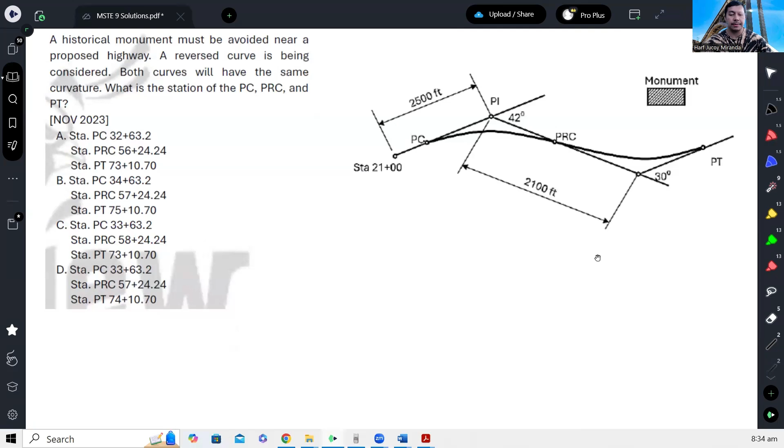A historical monument must be avoided near a proposed highway. A reverse curve is being considered. Both curves will have the same curvature, meaning same radius. The radius of the first curve is equal to the radius of the second curve. Let's call it R.

What is the station of PC, PRC, and PT? So we need to find these. The given station is here, which is not PC. The PC is indicated here. So to calculate that, let's look at what's given.

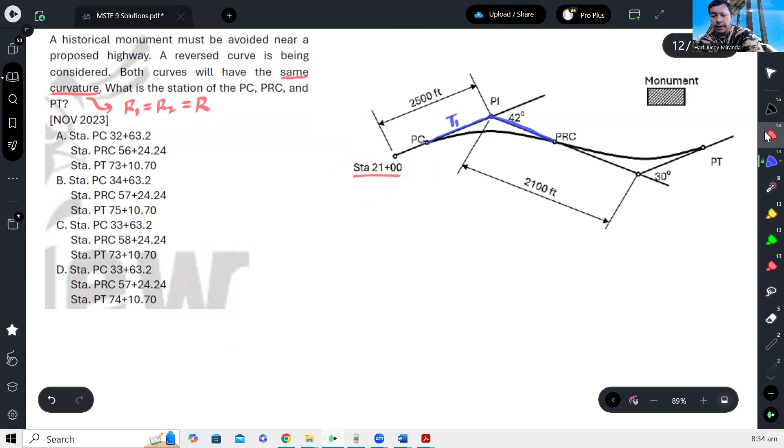From the drawing itself, we know that T1 plus T2 equals 2,100 feet. So T1 plus T2 is equal to 2,100 feet. And then, what else?

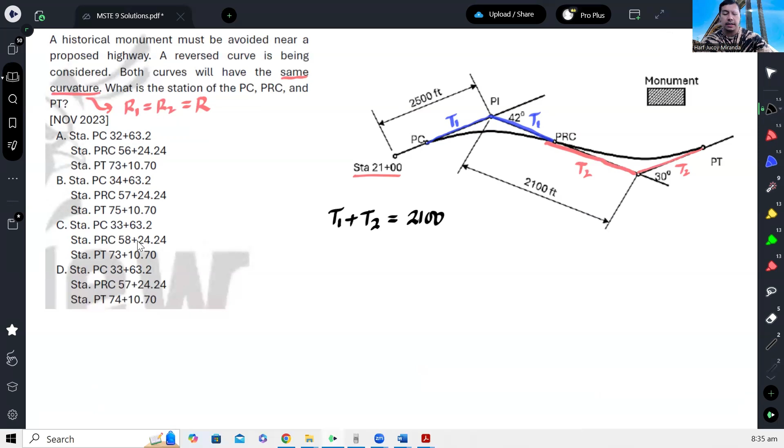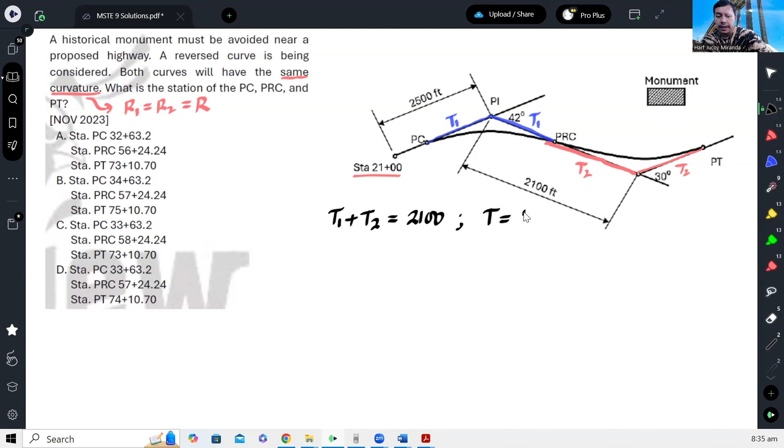We know that the tangent distance of a simple curve is equal to R tangent of I over 2. So for the first curve, this gives us I1. Then this is I2. So we have both I1 and I2.

Therefore, we can rewrite T in terms of R. This is going to be R tangent of I1, which is 42, over 2. Plus T2, which is also R since they share the same radius, tangent of 30 over 2, equal to 2,100.

So from this equation, we can directly solve for the radius. That is 2,100 over tangent of 42 over 2 - that's 21 - plus tangent of 30 over 2 - that's 15. That gives us 3,221.70 feet. Let's store this in A.

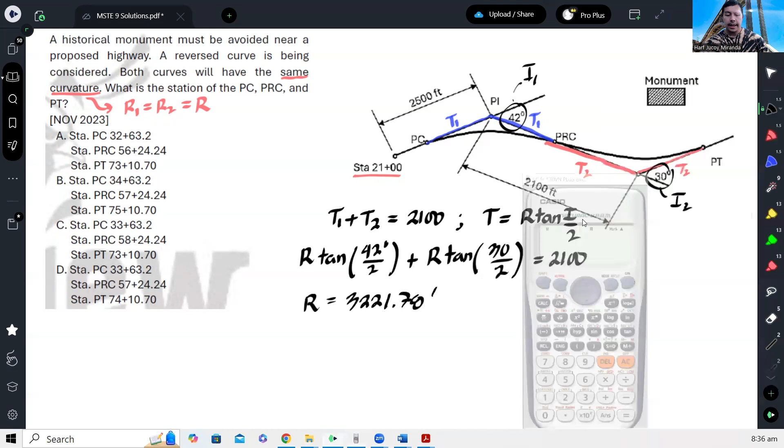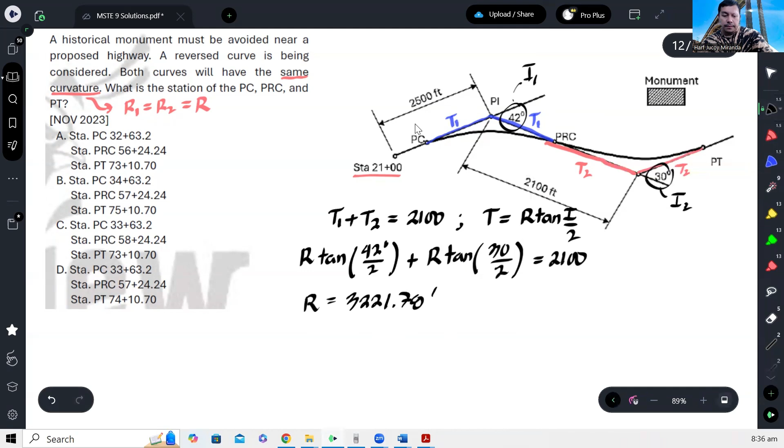Now that we have that, we can calculate the actual tangent distance, because we need that tangent distance to get this length, in order to get the stationing at PC.

That length is 2500 minus T1. So let's get T1 first. T1 is R tangent of 42 over 2, that is A tangent of 21. So our tangent distance is 1,236.73 feet. Let's store that in B.

Now we can compute for X. X is 2500 minus T1. So that is 2500 minus this value, giving us 1,263.27.

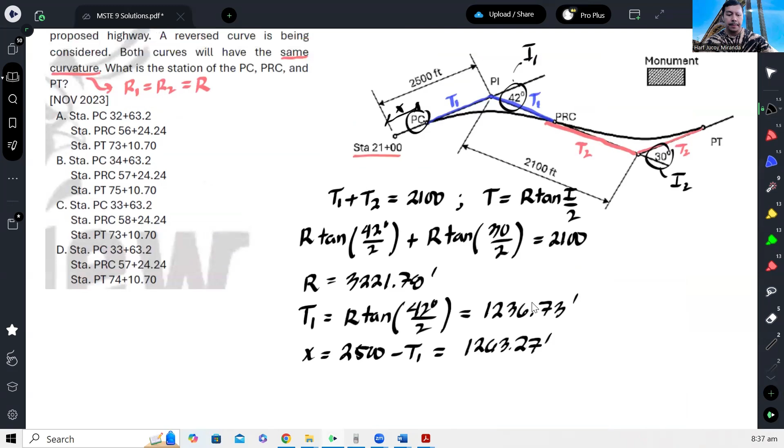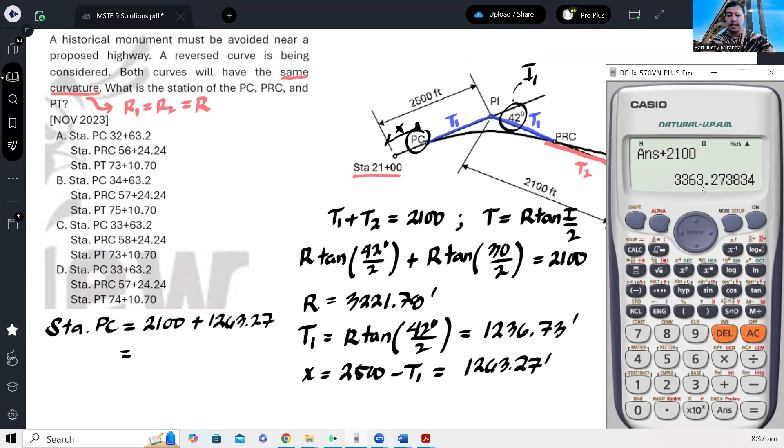Therefore, the stationing of PC would be 21,00 - let's drop the plus sign so it's not confusing - and then we add 1,263.27. So that would give us 33 plus 63.27. So this is now the stationing of PC.

That is r theta, right? So using this, which is I, and knowing the radius, the length of the curve, S, is equal to r theta, which is just r times I. Then we multiply by pi over 180 to convert degrees into radians.

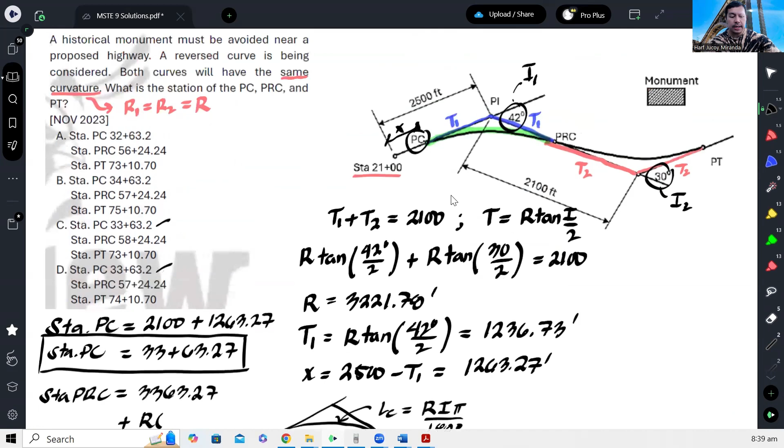So actually here, we can compute the stationing of PRC, which is equal to the stationing of PC plus LC. What is LC? It's R times I1, which is 42 degrees, times pi over 180. This gives us the stationing of PRC.

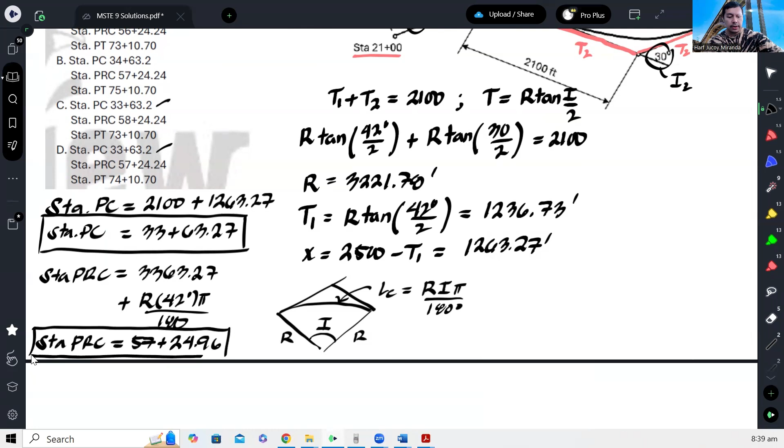So we have plus the radius we stored in A, times 42, pi over 180. That gives us 57 plus 24.96. So this is the stationing of PRC. So actually, we already have the answer, letter D.

Let's verify the stationing of PT. For the stationing of PT, we add this length of the curve again. So again, we'll add R, I, pi over 180, but this time our I is 30 degrees.

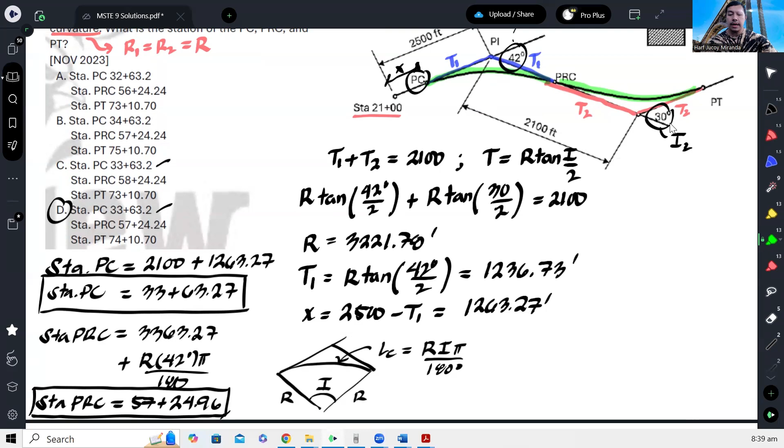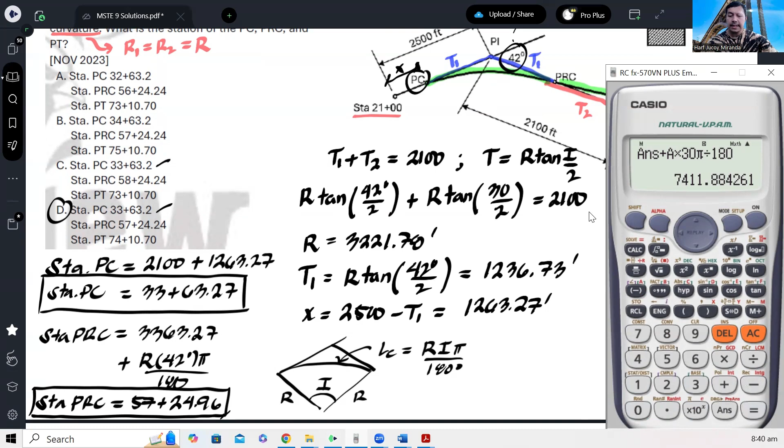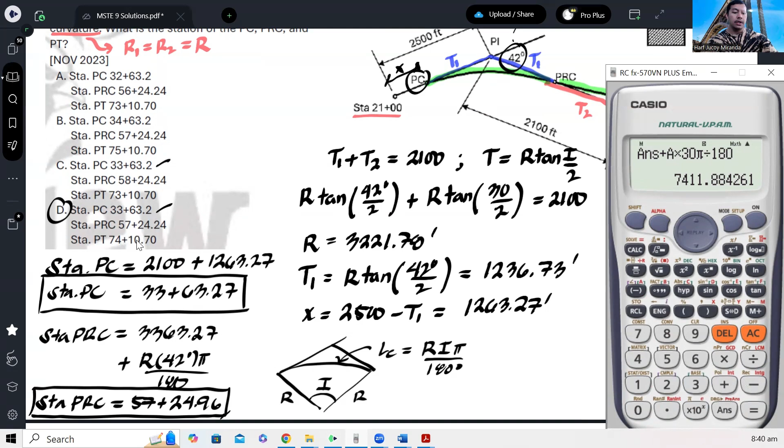Let me go straight to the calculator. So we add R, times I which is 30, times pi over 180, giving us 74 plus 11.88. There's a slight discrepancy because I used exact values in my calculation, while the examiner likely used rounded-off values, but that's close enough. Therefore, our answer here is letter D.

And that's how we solve this problem.